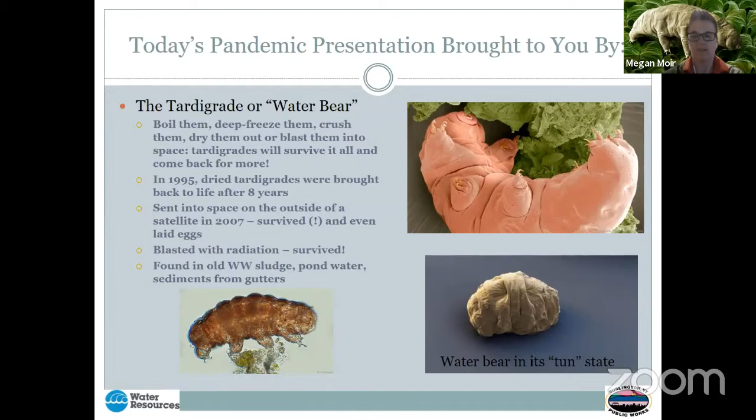I've seen them in pond water, and apparently people have also reinvigorated them from sediments that come from gutters. One of the things that enables them to do this is that they go into a state called a tun state, and that's really where they're most indestructible. I thought they were an appropriate creature for all of us experiencing COVID-19, because we are going through a lot of things we've never gone through. I sort of think of myself and others as being in this tun state, a little bit in my shell, trying to figure out how to get to the next day, just taking it day by day.

So a little background on me, how I got into water. For me, it really all started with Buffalo Bayou, a bayou that goes through Houston, Texas, where I grew up. Houston is known for lots and lots of rain - I now know also for lots and lots of combined sewer overflows. I spent a lot of time playing in puddles, sometimes getting attacked by fire ants. And I ended up going to Rice University.

While my original career plan had been to go to medical school, after I took a couple of what I called mud biology courses while I was there, I really realized that I would rather spend the rest of my life and my career with folks who spend a lot of time outside, get dirty, get muddy, and really figure out how this world works.

As part of my undergraduate degree, I did an honors thesis project on Buffalo Bayou, looking at it as an urban stream. There's a section that goes through a naturalized area, at least for Houston, and then turns into a concretized channel. I did field work and research on fish populations and water quality characteristics, and learned how important the adjacent banks and landscape around a stream are for water quality in the stream itself.

Eventually I made my way to Vermont, which is a whole other story. I did a master's in water resources at UVM, then landed in private consulting, focusing mostly on site management and hazardous waste sites. I had the fortune that the person doing stormwater management at that consulting firm left.

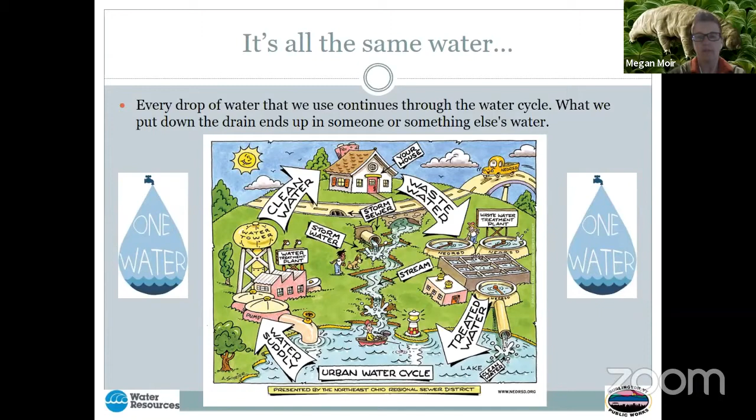One thing that's really beneficial about how our organization is set up at the city is that it's a one water organization. The drinking water facility and system, the wastewater system, and the stormwater systems are all under one division head, which is me. There's a lot of good reasons for that - anything we do, if we're not doing appropriate wastewater or stormwater treatment, that can have an impact on our drinking water.

We have a really good drinking water treatment system, but if you look long down the road of where humanity may go - not so much for Vermont, but certainly other more urbanized areas - we really have to be careful making sure we're completing the loop in all these different places.

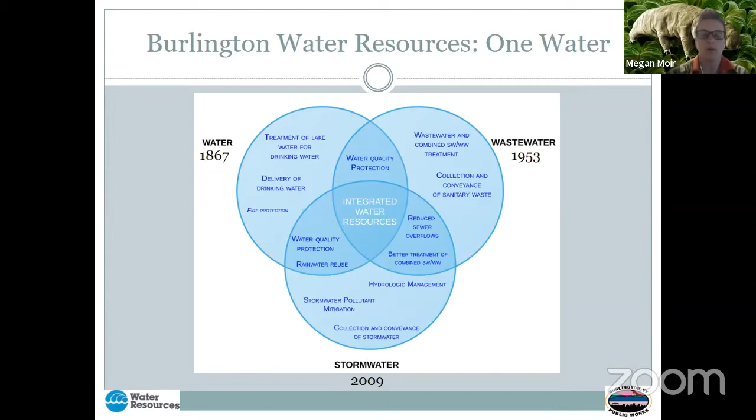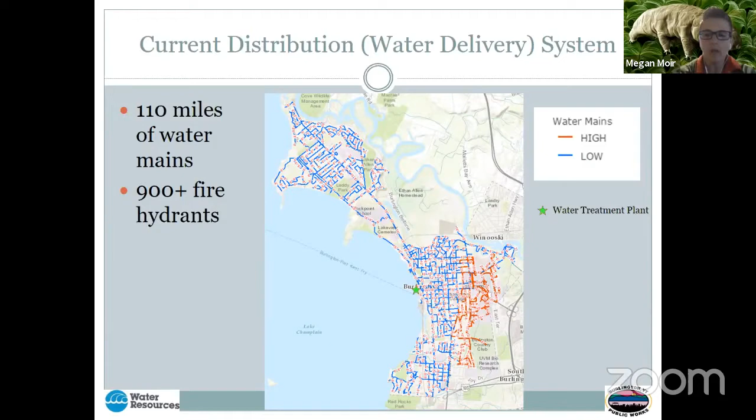For the folks who are on the tippy top of the hill, in order for them to have sufficient pressure, especially at places like the hospital where they are a multi-story building, we actually need to pump the water from the reservoir, from the 7 million gallon reservoir, up into the water tanks. One which everybody can see from the highway is the 500,000 gallon UVM storage tank, which is a traditionally looking storage tank. And then there is also a small one, I believe 150,000 gallons, on the Redstone campus, which has been in service for quite some time.

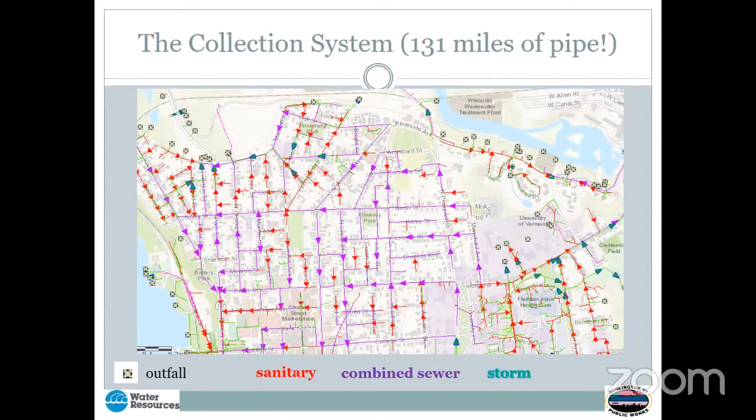Liz, I don't know if you can hear. Can you see my pointer? I can't remember if there's a way to get one. I do not see your pointer. Let me see if I can get one. You should just be able to use your mouse cursor. Are you seeing it now? No. No. Maybe now? Oh, yep, there it is. Okay, well, I'll have to turn my head to do it because of the situation of my multi-screenage. Let's see.

So I was just talking about what we call our horizontal assets. We also have a number of what we call vertical assets, which are our wastewater treatment, our water treatment facility, our pump stations, and our wastewater treatment plants. In Burlington, we've actually been doing a study to look at whether or not it would ever make financial sense to consolidate these wastewater treatment plants. The short answer is probably not, because of the geography. But we do have 3 wastewater treatment plants.

Our largest facility, which is on the waterfront, is Main Plant, which has about 5.3 million gallons a day capacity. We also have East Plant, over on Riverside. If you don't know where it is, because it's a little bit down the hill, if you're driving on Riverside towards Winooski and you smell donuts from Coffee Cup, and then you smell barbecue from Bluebird Barbecue, and then you smell something else, that's the Riverside plant. And then at the most northern reach of North Ave is North Plant.

We do still have, and we'll talk a little bit more about these, 5 untreated combined sewer overflow outfalls, shown with the red hash marks. We've gotten most of those under control in recent years, with the one exception being the Pine Street barge canal, which does still go off with some regularity and is our major area of focus right now.

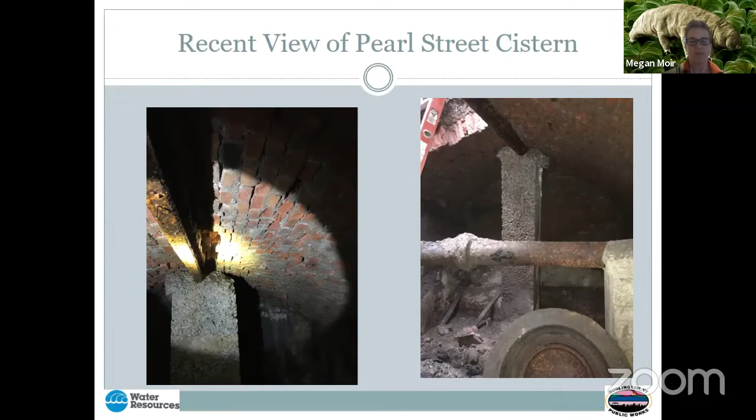Interestingly, this last year, we actually had a sinkhole that started to form, and it was directly on top of one of these cisterns. So we were able to get a look into these. It was one of the harder days of my life because for whatever reason, I had a strong attachment to the cistern, and we did have to fill it with flowable fill to make sure that there were not further collapses, but not without first documenting the beauty of this old cistern, which really was one of the initial parts of our water system.

In 1866, the city of Burlington made plans to purchase the Burlington Aqueduct Company, and then right from there went into an improvement plan for constructing a larger waterworks system. They built the pump house, which is on the waterfront in the same location as today. They laid a short intake 50 feet offshore, which you can imagine did cause problems later on.

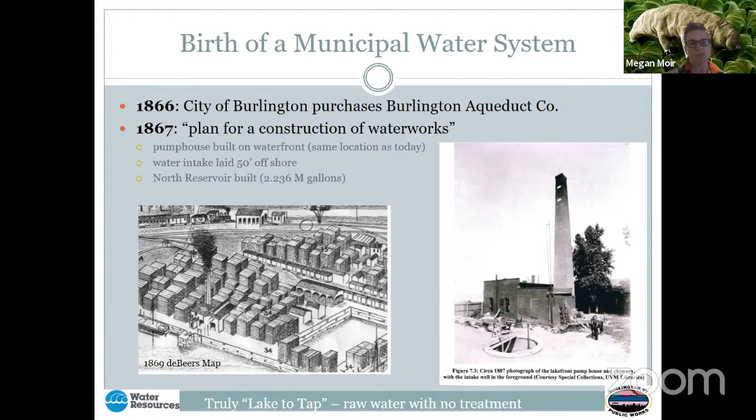They also built the first part of the North Reservoir system, that Main Street drinking water reservoir that I mentioned. I don't know what happened to that slide, it's an animation slide that I forgot about.

So in those times, there was one pipe system that was built from the lake and pumped water up to the reservoir. And then from there, they built out the rest of the distribution system. But at that point, it really was what we call lake to tap. So it was raw water, no treatment, sucking it directly from the lake and bringing it directly into the reservoir.

At that time, when they built the reservoir, they also built the gatehouse, which you can still see today, built in 1868. This gatehouse was later retrofitted, not that much later, but a couple of decades later, I believe, to the pump house. This is where the current pumps are that pump the water from the reservoir up into the storage tanks that we mentioned before.

This pump house is quite old, and we are pursuing design options right now for how to basically mothball this, retire this building, and probably build a new modern pump house behind it, but certainly maintain this as it is a historic landmark.

One of the cool things about the drinking water system when this came into being, it wasn't just providing drinking water to folks, it was also providing fire protection. So as all of these houses were built closer and closer to one another, the level of fire risk goes up. And so with the pressurized system that the Burlington waterworks system was putting in place, the fire department was able to transition from just using portable pumps to hoses, which actually connected to the pressurized system of hydrants.

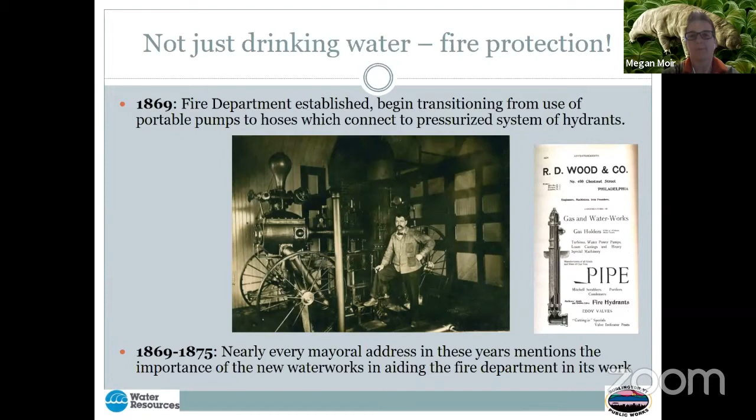It's really interesting, you can see how proud the mayor was at that time, because almost every mayoral address in those years mentions the importance of the new waterworks in aiding the fire department in kind of getting to this modern era. So meanwhile, that was the drinking water side.

On the sewer side, not a lot was going on, but they were advancing this concept of sewerage, which at that point was really just about collecting sewage safely from people's homes and getting it as far away as possible, i.e. to Lake Champlain. So they did start constructing some sewers in the vicinity of College and St. Paul.

There was a sewage outfall at the bottom of College Street. Another place sewers drained was into the old ravine, which is now fully covered over. They eventually laid a pipe there, referred to as the ravine sewer, which drained at the bottom of Maple, very close to where our existing wastewater treatment plant is.

There's some mention in those times of stormwater and storm drains also being connected to the sewer system, which points us in the direction of having had a combined sewer system.

At the time they started getting better about getting sewage to the lake, the city health officer started to notice additional impurities in the lake water near shore, and began talking about the need to extend their intake, the 50-foot intake, out into deeper water. Folks were realizing that as they concentrated their waste into one location, there were going to be downstream impacts, on our drinking water, which at that point wasn't being treated at all.

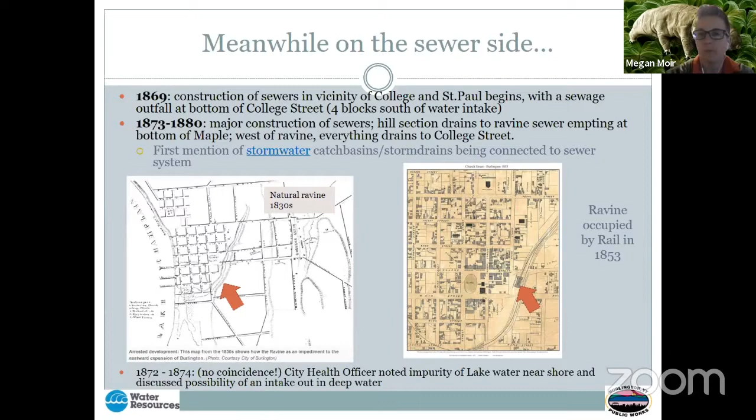Some other evolutions that happened were that more storage was needed. The high service, at the time Mary Fletcher Hospital, which we now have as the UVM Medical Center, was nearly completed and needed some additional high pressure water. So, in addition to the ground tank already in place and built in 1880, we built an elevated tank, the Redstone tank. If you drive by it, I call it Sputnik, because we put a fair number of cell towers on it for extra revenue.

We also needed more storage on the low service system. In addition to revamping the North Reservoir, we constructed a second reservoir, about 4 million gallons, to the south of that, bringing our total reservoir capacity to about 7 million gallons.

But we still were having water quality problems. If you look at the data from 1883, 1894, people were still dying from a lot of different waterborne diseases.

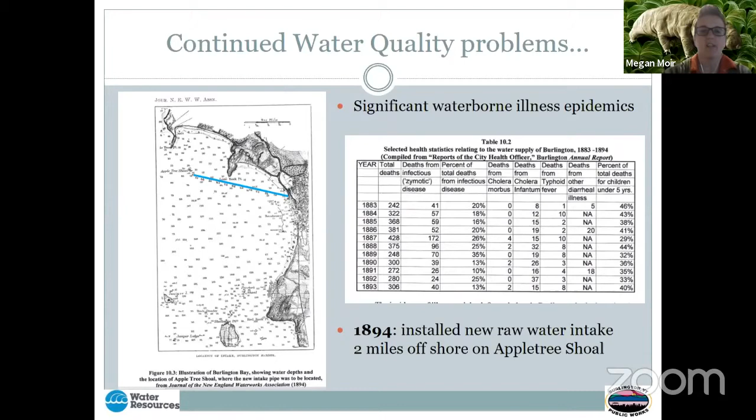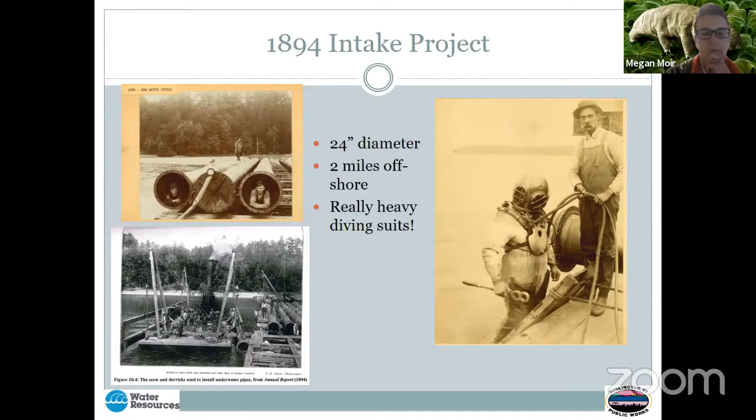So in 1894, the city endeavored to install a new raw water intake as far offshore as possible, extending a pipe about 2 miles offshore. We do engineering projects, and even an intake project at this point would be challenging, but when you look at pictures of these guys installing large diameter pipes offshore in really heavy diving suits, I feel lucky that we live in the day we live, because who knows how many folks probably died laying this pipe.

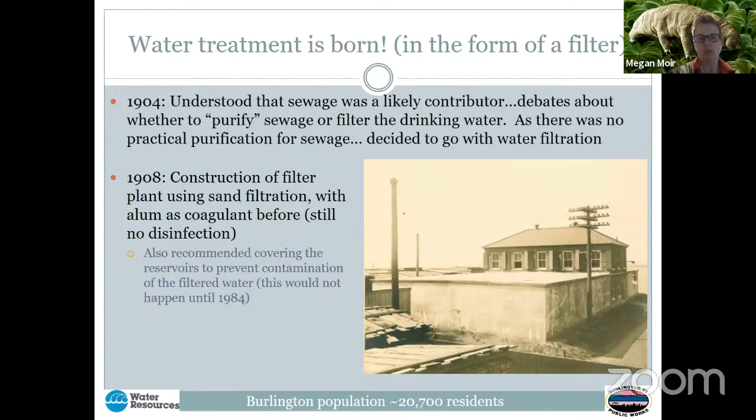So they decided to go with water filtration, constructing a filter using sand filtration with a little bit of alum as a coagulant beforehand. There still wasn't any disinfection at that time.

More years passed by, people still got sick, still got typhoid, and we followed a lot of other US cities and did begin to do some amount of disinfection by adding hypochlorite of lime or bleach to the coagulation basin. Extending into the 1920s, still had typhoid, and so eventually we replaced the hypochlorite system with a more efficient gas chlorination system.

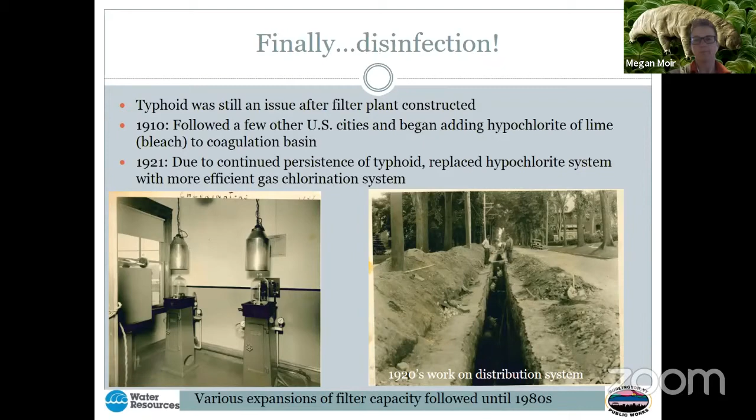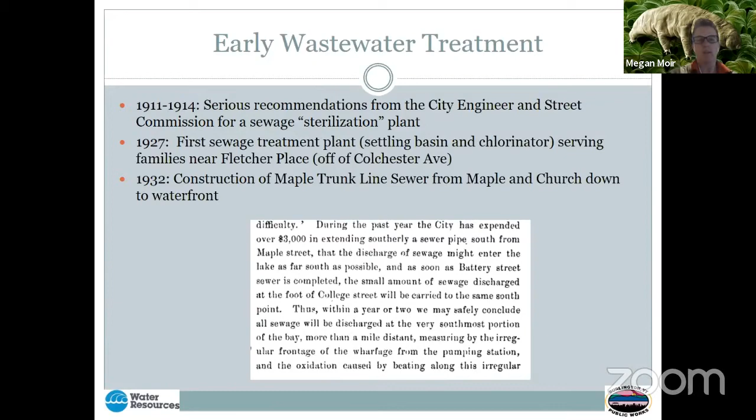One of the things when I looked at the history I found really interesting was the early wastewater treatment conversations. As early as 1911, the city engineers were talking about the need for a sewage sterilization plant. They realized that there was a connection. They did construct a very small one right off of Fletcher Place, off of Colchester Ave, which I believe was primarily for the hospital, and they were working on additional sewer construction.

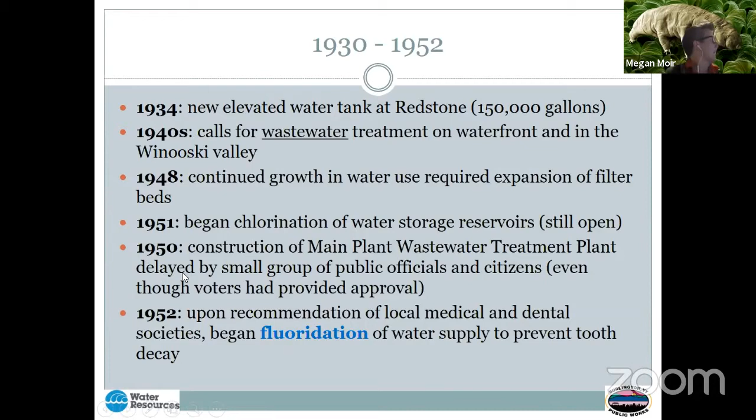But it actually took, this baffles my mind, it took until the 1950s to even really get it on the ballot. Then 1953 was when we finally got wastewater treatment, which is baffling to me, that we were just dumping raw sewage all that time up until 1953.

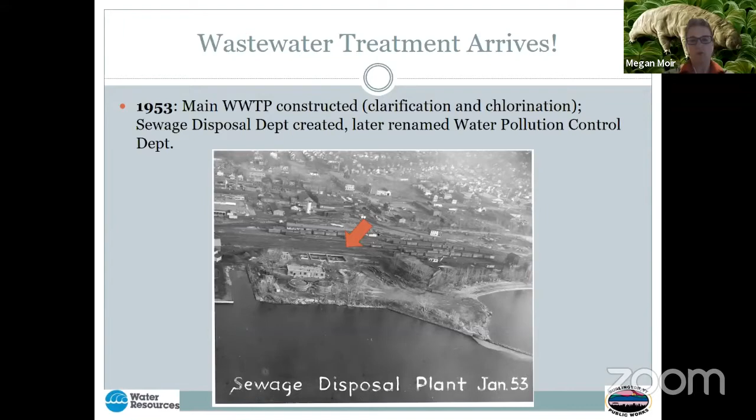But yay, 1953, we did have a rudimentary wastewater treatment plant constructed, which involved clarification, so settling out of solids, and then probably hitting it with vast amounts of chlorine to kill the bacteria. The North Avenue wastewater treatment plant was constructed a little later, in 1959.

Understandably a little risky. I can't remember when, it was prior to my time, there was an incident in which one of these pipes did break and did spill a large amount of sewage into the river until such time that it could be fixed. We do have much better processes in place now, as far as dye testing and river inspection by divers, to make sure that does not happen in the future.

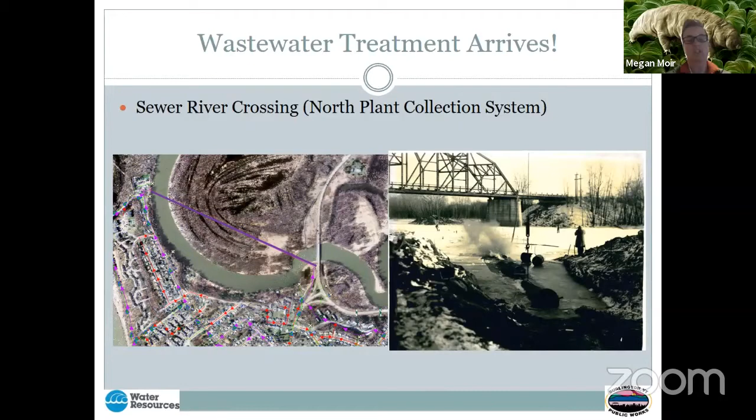So I'm going to skip through this. This is some sort of earlier iterations of wastewater treatment upgrades. Burlington certainly saw at that time, in the 1950s, a large increase in users.

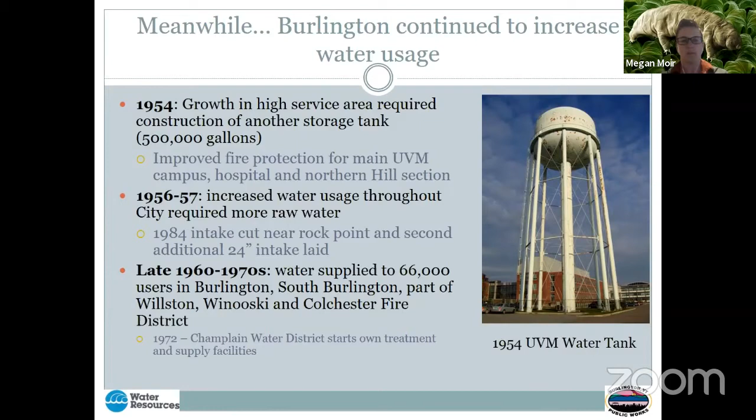In the 1960s and 70s, Burlington Water actually fed water not only to Burlington, but also to South Burlington, part of Williston, Winooski, and the Colchester Fire District. In 1972, those of you in Chittenden County who probably get your water from Champlain Water District, they started their own treatment and supply facilities, and we did certainly lose some customers at that point.

In the 1970s, there was a lot of scrutiny on our water treatment system and the need to comply with the Safe Drinking Water Act. At that time, we thought, and we were on a trajectory where we also thought we were going to need additional capacity at our plants.

So a $12 million complete treatment plant upgrade, including lining and covering of the reservoir. That reservoir on Main Street that now has a roof on it was actually uncovered until the 1980s. We also put in a new 30-inch intake.

With that, we did a number of projects in the 80s. We overhauled the treatment plant and got our treatment plant to where it is today, a modernized water treatment plant.

One of the cool parts, I guess, although I would love that revenue right now, is recall that I said the original predictions of how much water we may need to produce were in the 10 million gallon a day region when this plant was designed. On average, our plant uses about 3.6 to 4.4 million gallons a day. So we really are quite overbuilt.

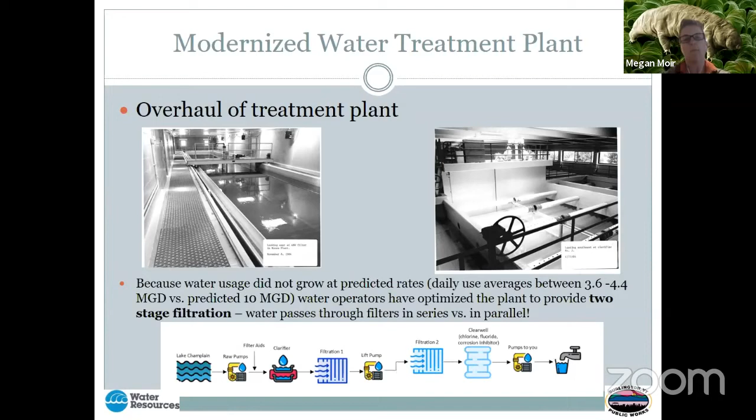Early on, the water operators realized, well, if we don't need all of that capacity, maybe we should optimize the plant to provide even better treatment. So in fact, Burlington water is treated through a filter twice. It goes through, originally it was supposed to split and go through two separate filters and then come back together, but now we're able to use those filters in series.

This is a little bit of a funny slide for me. I've spent a lot of time in this conference room. A lot of things change around us as a municipal facility that doesn't necessarily have a lot of money. The same conference room that was built in 1984 in the admin building is exactly the same conference room as we have in the 2020s. We do have some screens and some other technology, but most everything has not changed.

We're going to spend a little bit more time on this when we get into the challenges section. The 1980s were the major area of focus at that point, starting to deal with our wastewater and our combined sewer improvements. We had a large number of combined sewer overflow locations at that time, and actually discharged on the order of about 170 million gallons or more of combined sewer overflow into Lake Champlain every year. We still have a combined sewer overflow problem, but it is much less than that time.

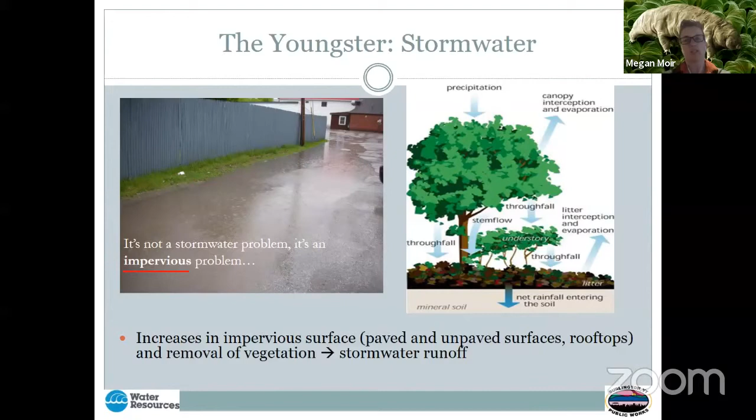The youngster to the sibling trio of water and wastewater is, of course, stormwater. I always say it's not really a stormwater problem, it's an impervious problem. As Burlington started to build out, particularly into the 1990s, water resources professionals began to realize that while wastewater, particularly combined sewer overflows, presented an acute impact of discharging bacteria-laden water into places where people might want to recreate or swim, stormwater runoff really represents a chronic impact. The vast amount of stormwater runoff and the pollutants it generates, you can't necessarily see it in the moment, but if you look at trends over time, it really can do a lot of harm.

A slide we have later on talks specifically from a phosphorus perspective, acre for acre, urban runoff is one of the bigger fish we need to catch in our fight against phosphorus runoff. Folks in the early 2000s were realizing that Burlington really needed to do more for its stormwater runoff and even its separate storm sewer system, and formed the Burlington Stormwater Program in 2009, which has dedicated funding. We actually charge people for water usage, for wastewater, and then separately, based on their impervious surface, charge them for dedicated funding that goes into our stormwater program.

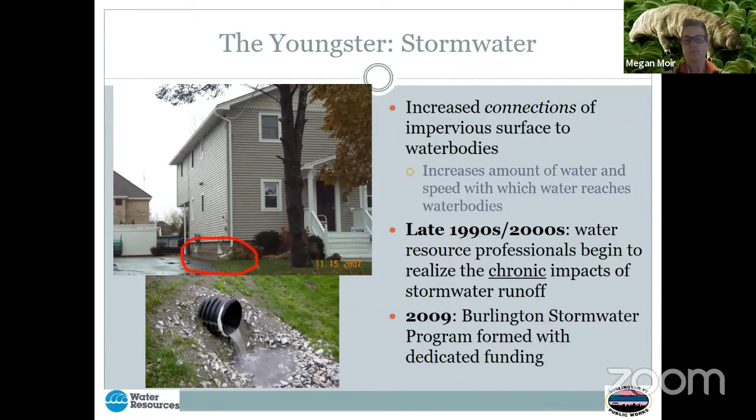So with that, before I get into our challenges or opportunities, I don't know if anybody has any particular questions about Burlington history. We will talk at length about the combined sewer overflow, because I know people often have questions about that, but any questions out there? Those watching, feel free to type your questions into chat.

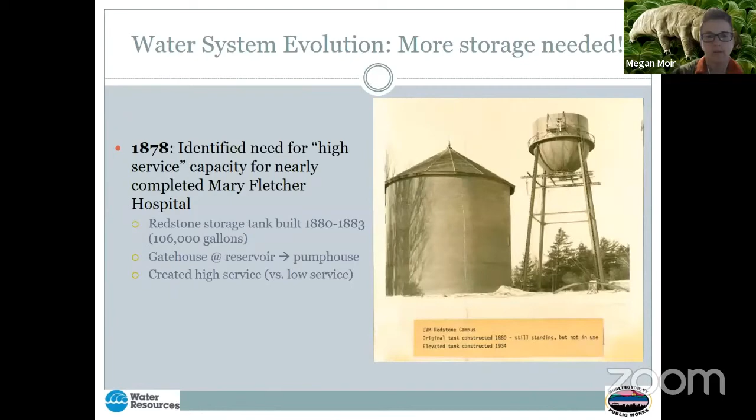I'm wondering, Megan, I'm having a hard time picturing where the Main Street reservoir is. What does it look like? It's, if you're driving into town, you get off exit 14 and you're driving and UVM is all on your right. Just before you pass the UVM green, there's fences and frankly some kind of ugly terracing to your left. Next time you're in town, when you see the gatehouse, let's see if I can get back here. So it's on your left, to the south of Main Street as you come in, right before you get to South Prospect. There's this berm area and this terracing, and then there's a roof. You can't really see the reservoir so much as you can see the gatehouse.

Okay, interesting, I've never paid attention to that before. Yeah, if you look on Google Earth or whatever, you'll see a massive roof area, which every year we try to figure out how we can do something cool, like put solar panels on, and I haven't given up on that dream. Originally we were going to do a green roof, but we're not sure structurally that the roof can handle it. But we do think that potentially we could move forward with a solar plan, which would be really cool, just because it's a roof structure doing nothing.

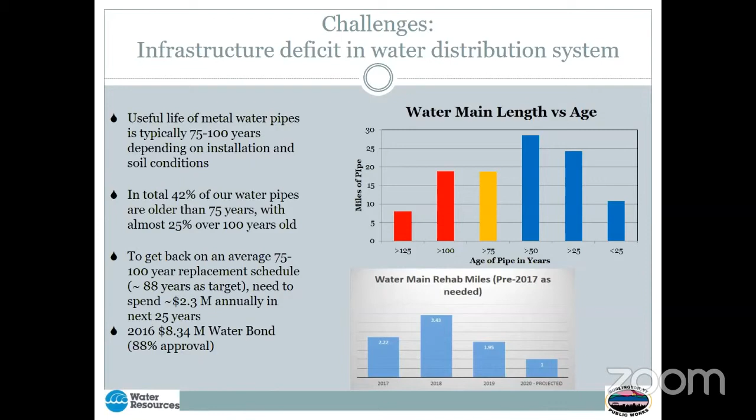Megan, I had a question about the 10 MGD that was predicted. Did they think there was going to be that much development, or was that more of, now that we're conserving water and have special fixtures, we're actually not using as much? I think it was a little bit of a whole bunch of things happening at the time. I haven't parsed it out exactly, but CWD came into being in the 1970s, which I think is when they were starting the design. So there was that piece.

And then also Burlington, from what I've heard, used to have a lot more water-heavy industries, such as I think there was a bottling plant. The soda plant that's on Pine Street, I think was an actual, I don't know if it was Coca-Cola or some other type of bottling, but there was just a lot more water usage. Between when the designs happened and when the plant was actually built, something changed. So I think it was a combination likely of the CWD plus industries changing.

Certainly over time, when I do my rate models, it's interesting because even though we do anticipate some amount of growth in the city, and we've seen growth because of what you said about conservation, our growth doesn't necessarily, just because we're building more units of housing, mean we see vast increases in the amount of revenue we get, which is a big challenge when we're trying to figure out how to pay for all of this stuff.

That, and we don't have a lot of dense development. I would love to be in a place like New York sometimes, where you have a whole bunch of people in a really tight space who are using a whole bunch of water. I could do so much with that money, whereas we're still kind of spread out. But I think we'll have a little bit of increase in growth over time. But that hurts you on the wastewater side—it gobbles up your capacity. So we don't want to see too much growth.

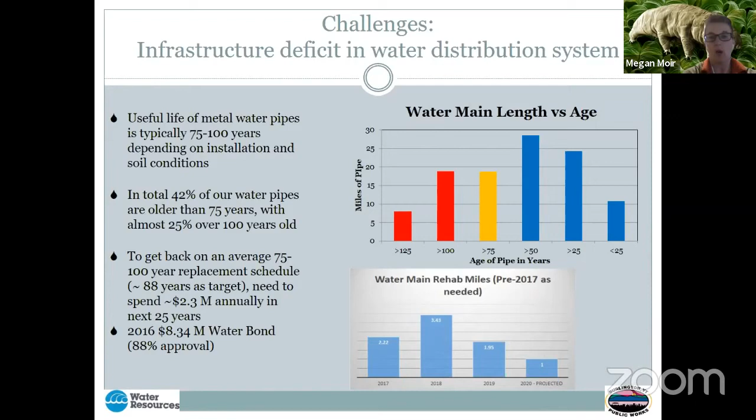So one of the things I have brought up with the mayor is that if we want to continue on some sort of trajectory, maybe it's not $2.3 million a year, maybe it's $1 million a year just to keep us pointed in the right direction. We are going to have to start thinking about another water bond.

And it's not just the pain of us having to deal with water main breaks. It is also dealing with the reduction in pipe capacity that happens. All of our metal pipes do have naturally forming tuberculation—that's internal corrosion or rust. It forms in all metal pipes everywhere. It's not lead, it is just a naturally forming product. Over time, that can cause a reduction in the amount of water that pipe can carry.

It also, unfortunately, causes water quality issues more from a discoloration or aesthetic standpoint than a danger. When there are any major pressure changes in the system, people will often get cloudy water in their homes and have to run their water until clear. We do believe that Burlington citizens expect, certainly, but also deserve clear water at their taps. So that was also a major driver for getting this project going.

The other thing was from a pure sustainability standpoint—we were noticing that oftentimes we were seeing a lot of water main breaks, potentially because of additional vibrations that would happen after paving. So the city and the general fund, which is funded by taxpayers, would go through and pave a street, and then unfortunately the water pipes would break and we'd have to rip up the street right afterwards. Not super smart—anytime you cut into a newly paved street, you've basically undermined all of the effort and all of the money, because any of those little seams are likely to become potholes very quickly.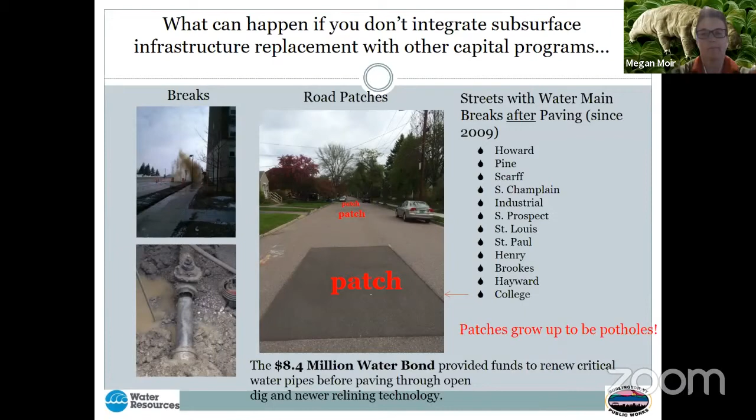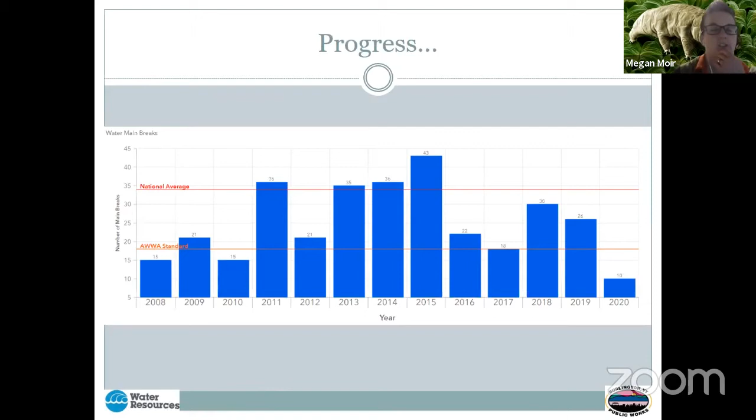The good news is that we're seeing some decline in the number of water main breaks. The numbers I can really only trust from when our GIS came into play after 2015. We started doing our relining project in 2017. We have had one or two bad years, but overall, the number of breaks we're seeing, while not quite meeting the AWWA standard of 15 breaks per 100 miles of distribution system, we are at least managing to stay below the national average.

So that's on the water side. Certainly on what we call the clean water, which is both wastewater and stormwater, we've got a ton of challenges. We have just pure infrastructure challenges. So even before we get into talking about reducing phosphorus to Lake Champlain, we have pipes that are breaking.

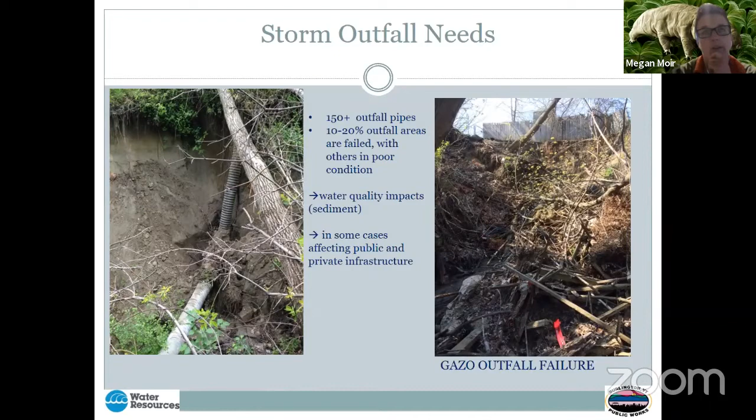We have stormwater outfalls that when we started doing inspections looked like this. This one, which is at Gazo outfall, has recently been repaired, but these projects are expensive. I think we spent $350,000 or $400,000 repairing this particular outfall, and we're on target to have to spend millions of dollars more to tackle some of our worst outfalls.

The pipes themselves, both on the sanitary side, our sanitary pipes are quite old and often have large breaks in them. Interestingly, our younger stormwater pipes, a lot of this stormwater system was laid in the 80s and they were using corrugated metal pipe. Probably cheap, pretty light, great. The problem is that corrugated metal pipe doesn't do well with all the salt that we have to put on our roads. And so when we've done an inspection of our corrugated metal pipe, almost 50% have some sort of structural deficiency, and about 10 to 20% of those pipes need near-term repair.

Fortunately, our Clean Water Resiliency Plan, in addition to providing funding for some wastewater treatment plant upgrades, is also providing some funding for us to tackle a relining program on our sanitary and storm sewer side. And I think over the next 2 years, we're going to be trying to line about 8 miles of these sewer systems.

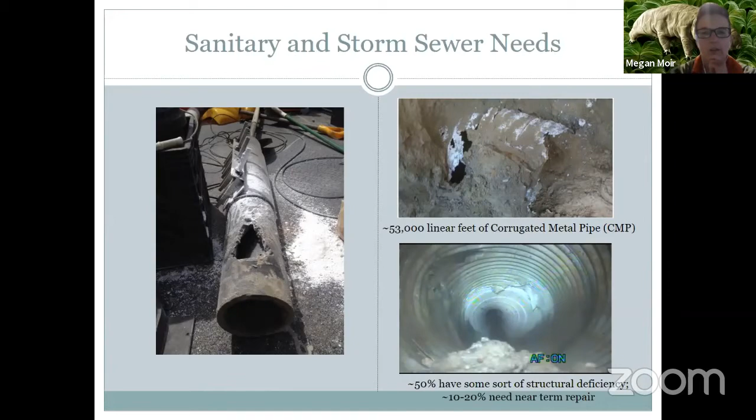As we head into summer, and particularly this really, really warm day, certainly on my mind are the algae blooms, which we have been seeing in greater frequency. This is certainly due in part to the constant onslaught of excessive nutrients, primarily coming from developed lands, but wastewater treatment plants do play a role. But also some of the other issues, I think, of climate change with seeing the warmer water, the water in the lake heating up more quickly.

I mean, if we're getting an 80 or 90 degree day at the end of May, it's actually a little concerning for what the summer may look like with regard to algae blooms. But that combination of the excess nutrients, warm water, as well as calm water, so these days when there's no wind, can cause these cyanobacteria blooms to form.

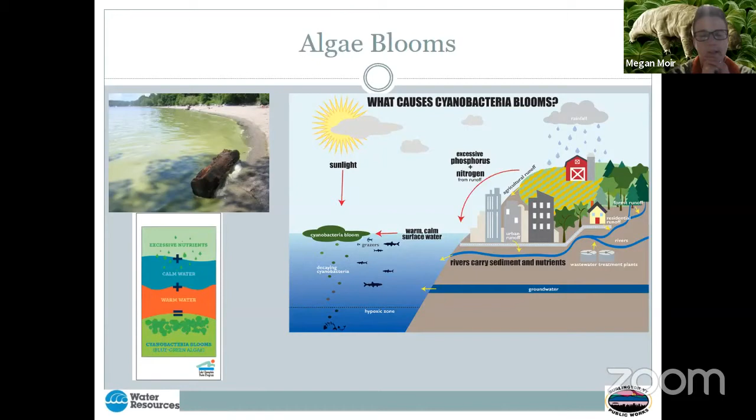As I've already said, and there's a typo there, Stormwater. We get really focused on farms and we get really focused on wastewater treatment plants. But when you break it down to the load, if we look at the orange here, that's the developed land. So overall, wastewater treatment plants are still quite a small proportion of the load.

Sometimes there's a tendency to go for that because it's quote unquote easy to grab, because it's an end of pipe solution. But folks do need to know that the costs involved of upgrading to improve phosphorus control are huge and substantial, and they're all being focused on this sort of end of pipe solution where they don't have any other co-benefits. So that's something that we're kind of weighing carefully.

But the developed lands here, while it's 16% of the overall load, when you break it down into the 16% of the load but only 4% of the land area, you end up with a huge amount of loading per square mile. And so that's why we really do need to make sure that our cities are focusing as much as they can on both non-structural ways of managing stormwater runoff, so street sweeping and catch basin cleaning, as well as looking at how we can retrofit our landscapes to put in stormwater treatment.

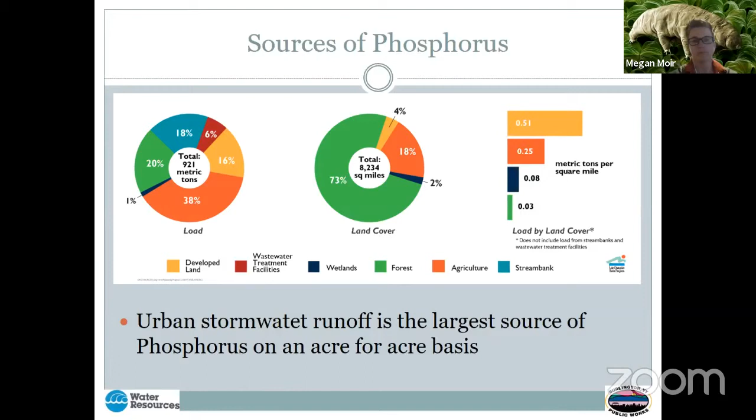On the other side of the stormwater runoff coin is our issue with combined sewer overflows. For those folks who aren't familiar with what a combined sewer is, in a lot of the older cities, particularly across the eastern seaboard, the wastewater and the stormwater go into the same pipe. So the street storm drains are draining to the sewer, as well as the poop and the pee that comes from anybody's home or business into the same pipe.

Now, generally, this is a good thing because it means that the stormwater, which otherwise would get zero treatment - and we talked about how stormwater has a chronic pollution issue - under a lot of situations does actually get treated by the full treatment train of the wastewater treatment facility.

However, the flip side is that when this pipe becomes overwhelmed with stormwater and cannot fit all of the stormwater and wastewater to the wastewater treatment plant, and also to protect the plant itself from being overwhelmed by the flows, there are relief valves out in the system which allow some amount of combined sewer - a very small percentage of sanitary waste with a larger volume of stormwater - to spill out into a receiving water.

The other benefit of these relief valves is that it prevents combined sewer from backing up into people's basements. So people who are on the combined sewer should have what's called a backwater prevention valve, which prevents water from the sewer main from going up their sewer lateral and getting into their basement. But a lot of older homes do not have that.

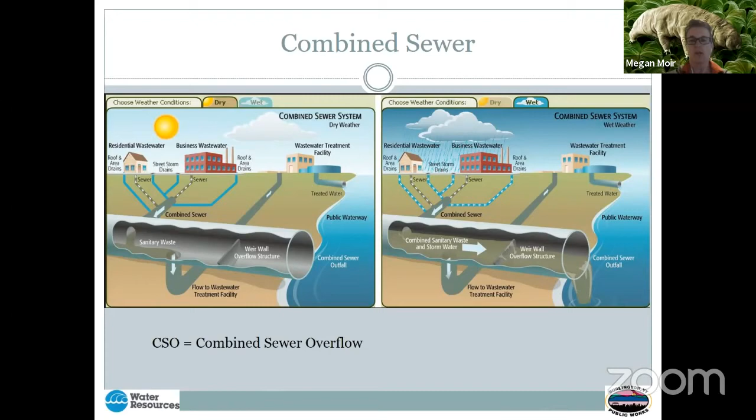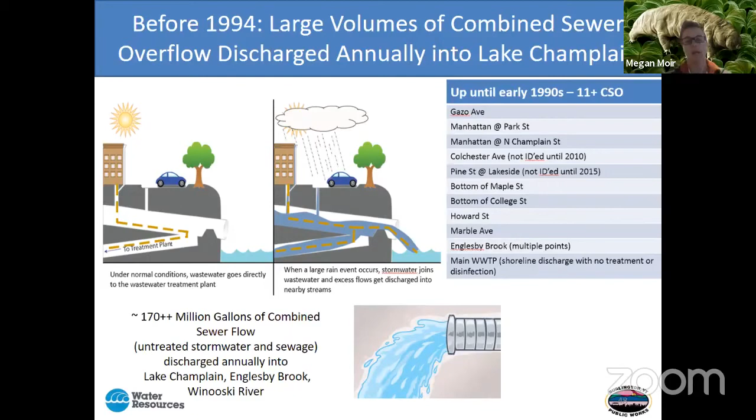As I alluded to before 1994, we were discharging massive volumes - likely more than 170 million gallons - going into Lake Champlain, Englesby Brook, and the Winooski River. We had 11 different CSO locations. And then, I think in the late 1980s, a plan was put into place to figure out how to tackle this.

So in many places, we did pursue at that time the low-hanging fruit of sewer separation. In a couple places in the Old North End, and to a large extent in the New North End of Burlington, we went through the trouble of laying a separate pipe and then connecting the catch basins to that separate stormwater pipe. Now recall, the water is now going from the roadway - oily, greasy, whatever's deposited, people letting their dogs poop on the ground - going right into a pipe and right into a river with absolutely no treatment. At that point, it was viewed as the best thing to do, but we now know there are those chronic impacts.

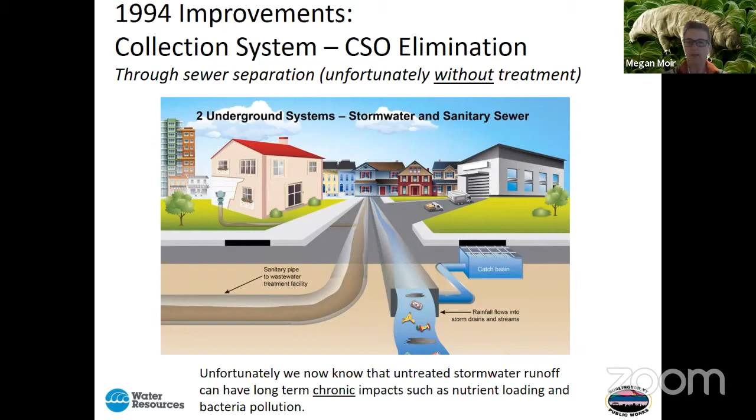So the major upgrade that was done at the main wastewater treatment plant involved improving the overall phosphorus removal of the plant for regular sewage treatment down to 0.6. We often are seeing numbers much closer to 0.2, and sometimes below that, with all the chemical optimization we've done. But that is the sort of initial capacity or removal benefit that was achieved.

We increased the overall sewage treatment capacity from 4 MGD to 5.3. And then, most importantly, they improved the ability of the full treatment train to deal with a peak flow rate of up to 13 million gallons. Now, your typical CSO event, once you started consolidating all of those previous CSO outfalls, certainly gets above 13 MGD.

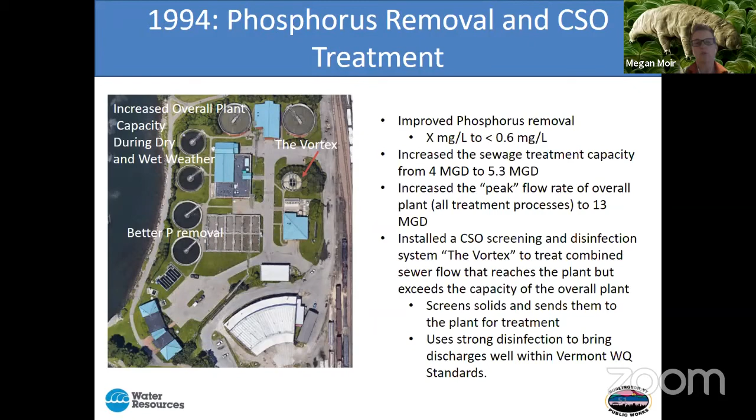And so what they then did is install this thing called the Vortex. So when the treatment capacity and hydraulic capacity of the full plant is overwhelmed, water starts getting shunted to this Vortex, which uses centrifugal force to get as many of the remaining solids to drop out. Those solids, the dirtiest part of that water, do pass through the wastewater treatment plant. Most importantly, the water that leaves the Vortex is then hit with chlorine, a strong disinfectant, which brings the bacteria level in the combined sewer overflow down to a level within Vermont water quality standards.

So that's what it has enabled us to do, when we look at what we were doing prior to 1994 - 170, likely more, million gallons of untreated CSO volume. Now these days we are having a CSO, but it is a treated CSO.

And also we're able to fully treat.

I think in 2018, the stormwater portion—so when we look at the increase from our daily flow to a storm event—we were able to treat over 200 million gallons of stormwater through the full treatment train. We were also able to deal with about 100 million gallons of flow that went through the Vortex and was treated, meaning screened and then heavily disinfected.

In 2018, which was certainly one of the least favorite parts of my career, we did have a number of plant infrastructure issues, which resulted in us discharging about 12 million gallons of treated but not fully disinfected water. And in that year, we also had about 1 million gallons of CSO.

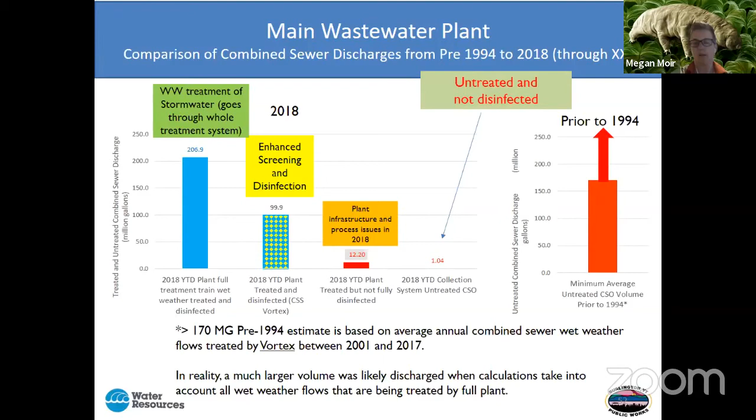It fluctuates from year to year, but as I said, we do still have CSOs primarily from our Pine Street Barge Canal. But I do take great solace in the fact that compared to this number, this red bar, 170 million gallons—if we're discharging on the order of 1 million gallons a year of untreated CSO, still not desirable, but we are in such a much better place, and we've done so much work since those times when we were just discharging things into the lake.

I'm going to skip this for now.

In addition, more recently, separate from the increased capacity at the plant, we've really been focusing on trying to grab stormwater, both separate stormwater as well as combined sewer runoff, or runoff to the combined sewer, to slow the water down.

When and where possible, these are all examples here at the top of infiltration systems. So instead of letting the water that goes from a catch basin or from a roadway get into the pipe to get to the plant, or to get to a pipe that then could cause a combined sewer overflow, we're letting that stormwater reconnect with its natural hydrologic cycle by soaking into the ground. If it soaks into the ground, it doesn't cause runoff, it doesn't cause problems, it doesn't get to a pipe. It really is in its happy place, and we like to keep it there.

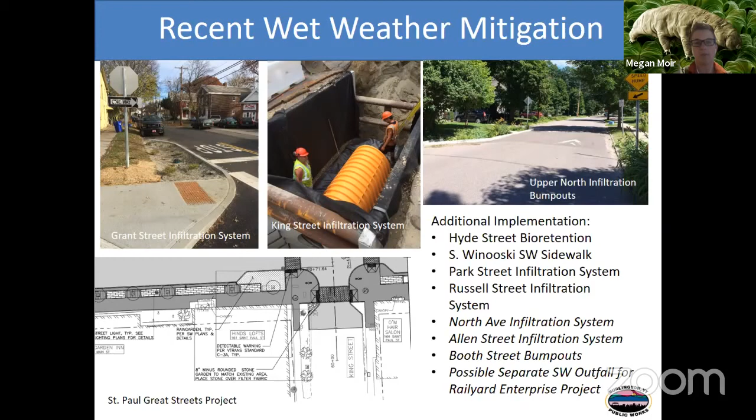Unfortunately, at the same time that we were saying, 'yay, we've tackled, or we're so close to tackling our combined sewer overflow problem,' a stormwater technician was doing some mapping and identified what we now call the Pine Street CSO. It was not identified on our maps. Once we found it, we did report it to the state, and as I've said, that one is now the one that causes the most trouble for us.

The challenge is—not that I really want to compare it to the 1980s, although I think it is sometimes similar—is we're now getting to the tippy top of the tree. In the 1980s, we tackled the low-hanging fruit. We spent a lot of money, but we were able to do a lot with that money. Now the fix is a lot more complicated. What do we fix first?

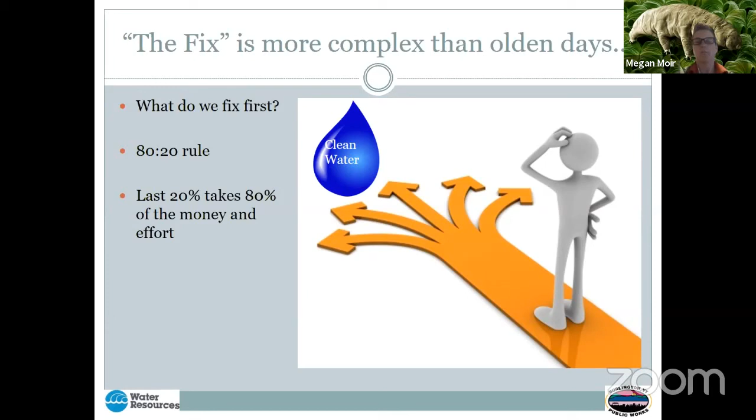I've expressed a number of challenges that we have, and they're big challenges, and they're going to cost a lot of money that the ratepayers may not be able to afford. We got to remember the 80-20 rule, the Pareto principle—this last 20% is probably going to take 80% of the money that Burlington has spent over its many, many years tackling water quality.

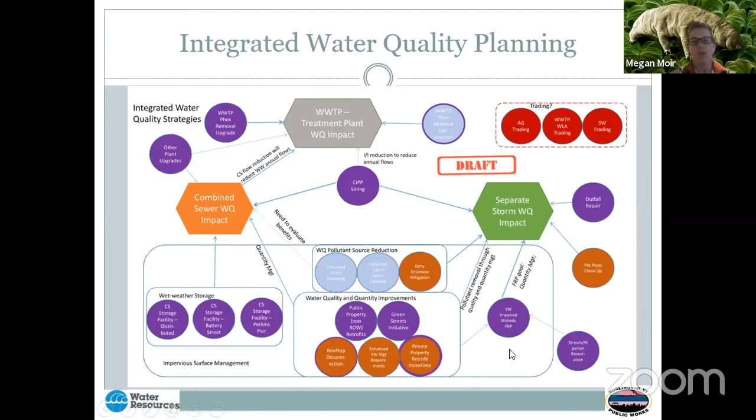When you look at—I call this the map of my brain—our integrated water quality planning process, there's a lot of connections between what we do at the wastewater treatment plant, what we do for combined sewer impacts, and what we do for separate storm. There are so many different ways that we could tackle that. One thing we know we want to do, to the extent that it bears fruit on the water quality side, is that we don't want to just go after the easy thing if we could find something else that would have maximum co-benefits.

When we look at potentially upgrading the wastewater treatment plant compared to doing green stormwater infrastructure, which could slow down the water in the combined sewer system or filter the water in the separate storm sewer system, we want to find the solutions where we're getting the maximum benefit, the maximum pounds of phosphorus removed for the money, but also the maximum benefit. So if a project, instead of just doing a tank underground, can provide aesthetic improvements, shade trees, habitat for bees and other wildlife, we want to go after those.

One place we've done a lot of collaboration with our general fund engineers, who manage the streetscape, is combining traffic calming projects with stormwater projects. If you're ever driving on North Street, at the very top, turn right on Colchester Ave onto Mansfield, then left on North Street. Some of our best examples of stormwater bump outs are right there, providing traffic calming for the neighborhood, which is a common cut-through street, as well as soaking up stormwater that used to just run into a catch basin.

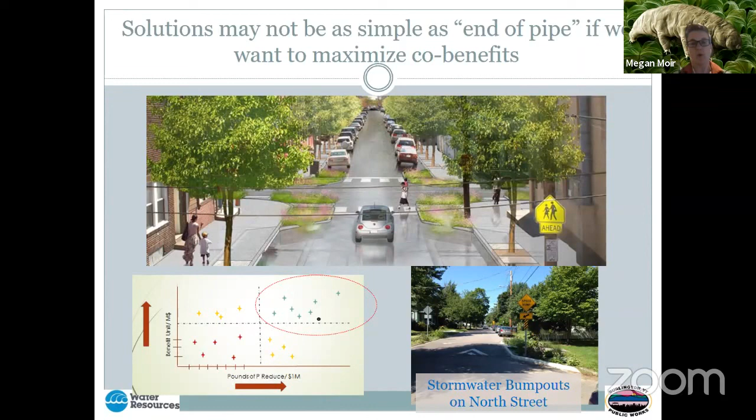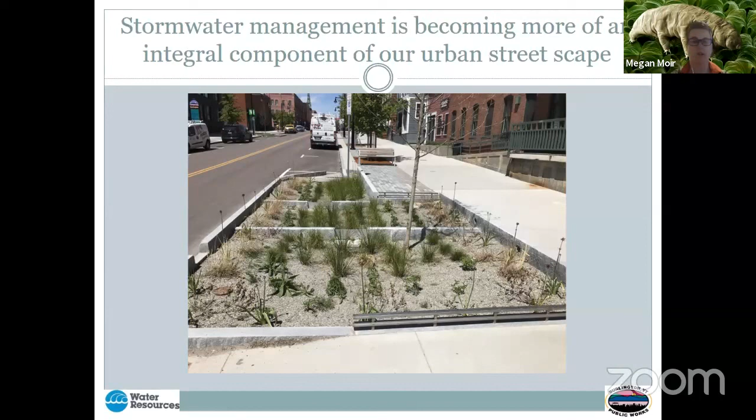One of my favorite things to do in a rainstorm—not a lightning storm, but a rainstorm—is go stand under a tree and just be amazed by how little water actually gets through. They're capturing the water on their leaves and branches and evaporating it back into the sky, and it's stormwater that never becomes runoff. If it's not runoff, it's not a challenge for me.

And I'm going to end—I was just going to say, I'll give you a two-minute warning here. Oh, well, perfect, I'm right on time, as long as nobody has questions.

This is my last plug: consider your choices when paying for drinking water. I know none of us have deep pockets, and when I have to pass a rate increase, I do consider the economic issues of all the ratepayers. But drinking water right now is still so cheap. When you look at the cost of bottled water—often way more than what you pay for gasoline—and compare it to what a Burlington resident pays per gallon to have it delivered to your home, we're looking at less than half a cent. I think that's really important, and across the nation we're all struggling to make sure we're taking care of our systems, and to do that, we're going to need more money. So with that, I'll take any additional questions now that I've taken up the entire hour with my stuff.

Oh, thank you, it was really interesting. I learned quite a bit, and I've been in the Burlington area for 20 years now. So, great job.

Yeah, thank you, Megan. It doesn't look like anyone's typed in any questions, but that was awesome. Good, I'm glad—like I said, I can talk about it for a while, as my wife will attest to. Sometimes she's like, shh, no more water.